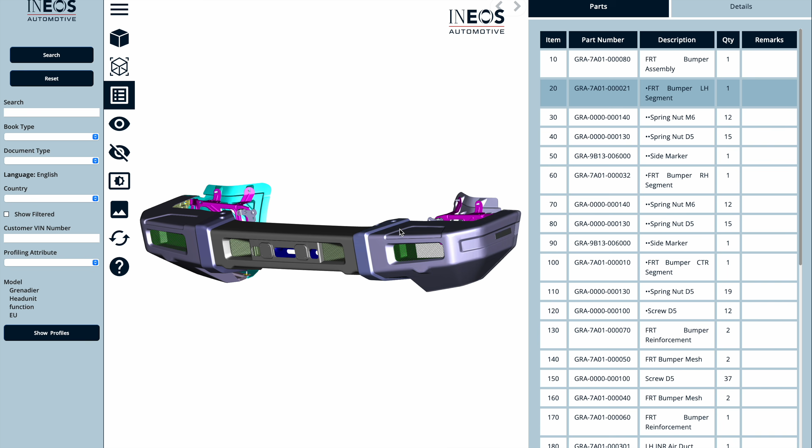As you can see, once we get into that, you can see the front bumper assembly here. As you scroll over each part, the corresponding part number on the right hand side lights up, and there's quite a lot of parts in this, so you can also rotate it, spin it around to see some of the parts on the inside.

Whichever one you highlight will light up. If you double click it, you get a zoomed in view, and then you can pick out individual parts like these screws here.

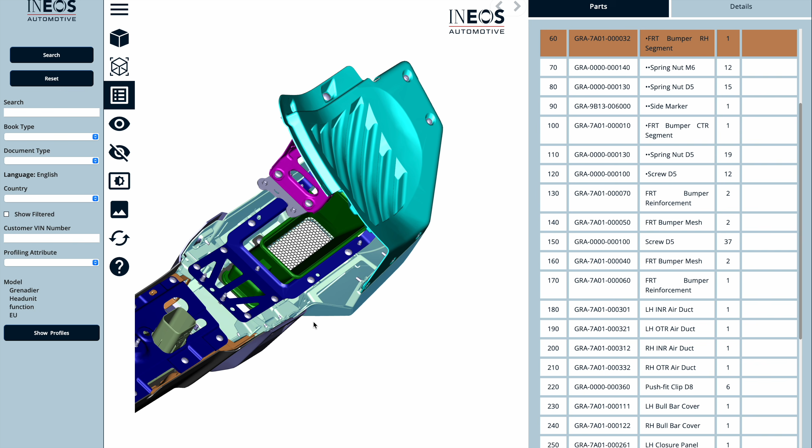It's pretty easy to use, and if you did have a bit of an accident and were trying to buy parts, it's pretty easy to find all the different bits that you might need.

Now let's take a look at the manual. Electrical, let's say we smashed a headlight in that accident. Lights and indicators, headlamp left, remove for access and install. Let's have a look at that.

That opens up this page here where you can see the headlamp assembly, and there's a play button down here, and the instructions are over here on the right hand side. If we press play, it should guide us through the instructions one by one.

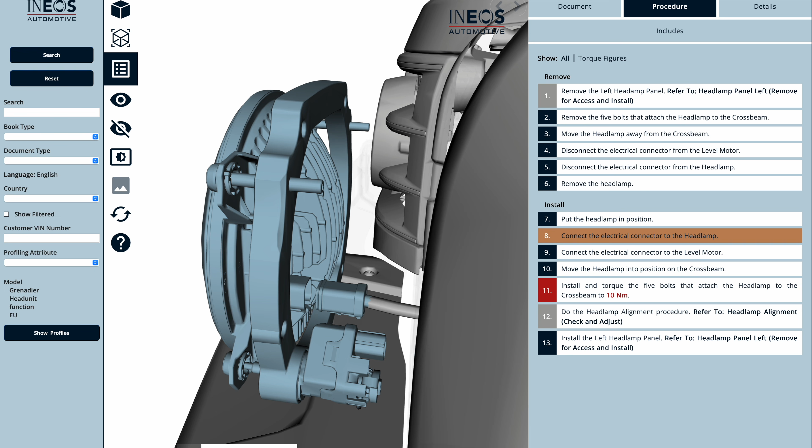Remove five bolts to detach the headlamp. There's the bolts coming out. Move the headlamp away, disconnect the plug, disconnect the other plug, and reinstall. Screw it back on.

It's a pretty good system, this. It's pretty idiot proof, and if there's another part of the process that you need to do to get to the headlamp, which is down here, you just click that and it should take you through to the procedure to remove that part. There we go. So I'll press play on that one.

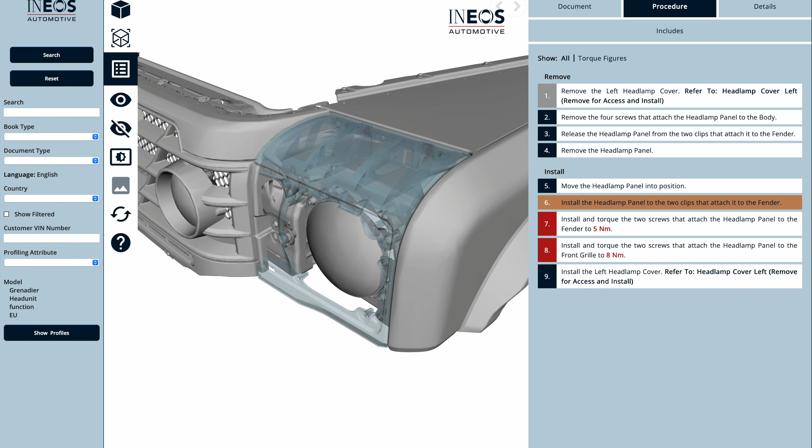Overall, I think this manual is an excellent resource. I think it's going to be super useful and kind of essential really if you want to work on your own vehicle, especially one as complicated as this. It's not going to be available to everybody, only to Grenadier owners. You will have to supply your email address and your VIN number to get a login to get access to the system. Once you've done that, you're good to go. Overall, I think it's very good.